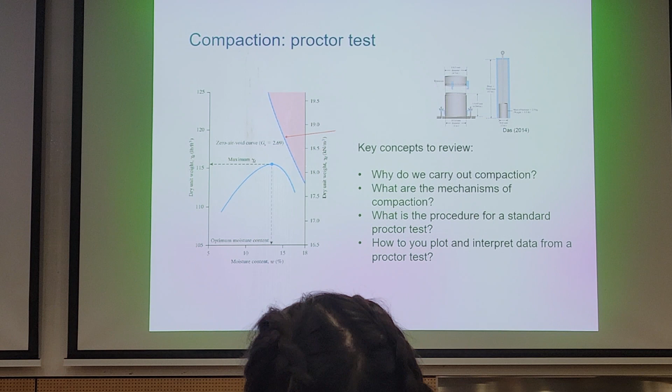Another aspect of shallow compaction that we looked at was related to quality control. There are 3 main quality control methods, if you recall: the sand cone replacement test, then we also have the rubber balloon method, which is

method-wise and concept-wise more or less the same as the sand replacement test. If you understand the sand replacement test, there should be no problem with the rubber balloon, because you're essentially digging a hole and trying to find the volume of that hole to deduce the dry density.

We also mentioned that there's something called a nuclear gauge. Although the concepts are more complex, at least you should understand for each of these 3 quality control methods for shallow compaction, what are the advantages and what are the disadvantages for these approaches.

Related to compaction, how does it happen in the field? What type of plants and equipment do we use? When is it beneficial to use a particular plant over another?

More importantly, how do we use relative degree of compaction or degree of compaction? How does it link between field and lab? You should understand the physical meaning of the degree of compaction.

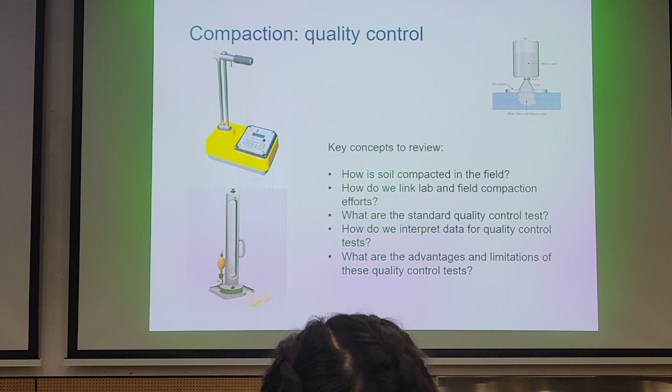And if I tried to change it into a rubber balloon question, if you understand the concept for a sand replacement test, it would be exactly the same - only, for one you're putting a fluid membrane in, and for the other you're putting sand in. So that's all you should understand for quality control or shallow compaction.

Near the latter part of the first module, compaction, we discussed deep compaction, and over the course you would have realized that there were overlapping elements in the other types of ground improvement that were also very similar to deep compaction. For example, some of the deep mixing or deep replacement approaches were somehow compacting soil as well. So there were some overlaps that, if you notice them, might be quite useful for you, right?

For deep compaction, you have to be able to understand what the fundamental differences are between shallow and deep compaction. When would you recommend either approach? How do we do quality control of both approaches? Evidently, we just talked about the sand replacement, rubber balloon, and nuclear densometer tests for shallow compaction, but can we do the same thing for deep compaction, or should we use something else?

If I give you a scenario on a site, maybe you can tell me which compaction method I should use. In order to do that, you have to be able to reveal what the disadvantages and advantages of both approaches are.

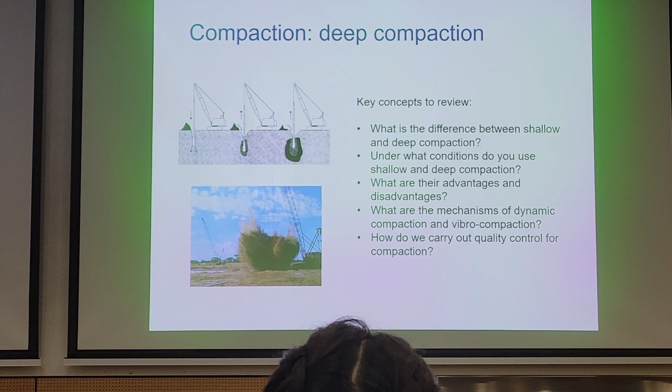Conceptually, there are 2 deep compaction methods: dynamic compaction, where we're dropping a heavy weight on the soil, and vibro compaction. You should be able to explain, at least conceptually, what we're trying to do in the soil with these 2 approaches, and that's all you probably have to study pertaining to deep compaction.

And then we moved on to perhaps one of the most important modules related to consolidation. It's quite easy to give written questions for consolidation, so please spend more time trying to understand the fundamentals. Even though consolidation was a single module, we broke it up into several core components. Let me talk about these components.

We talked about oedometer testing. Conceptually, what's the difference between drained and undrained loading? Can you explain what's happening to the soil in terms of soil mechanics fundamentally? What's the mechanism for consolidation? This is something you probably learned during your second year soil mechanics class.

And then, can you compare consolidation with compaction? What are the fundamental differences? How do we conduct an oedometer test? Can you discuss the procedure? Although we didn't go into a lot of detail, this is somehow a review of your soil mechanics class days.

And if you look at an oedometer test result, can you explain what's happening in terms of the phases? Is this primary consolidation? Is this secondary consolidation? What's happening based on this dial gauge reading with time or with effective stress? And what are the different aspects of an oedometer that we can vary? Perhaps, what does it mean to have single versus double drainage? These are very simple concepts, shouldn't be too perplexing for you because you have, well, passed the soil mechanics class, right?

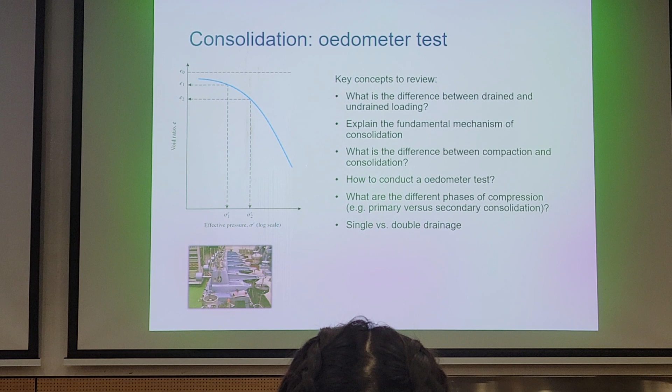And then, taking a step further with the oedometer test reading, some key concepts I want you to review. Evidently, we have to understand what is OCR. What does this ratio mean? To understand this ratio, you have to, of course, understand what the pre-consolidation pressure is. And we have discussed a graphical approach to find the pre-consolidation pressure, if you remember. Can you pull off the pre-consolidation pressure using this approach?

What does it mean when a soil is heavily over-consolidated? What does it mean when it's normally consolidated? Where are you on the graph for both scenarios? How do we estimate the compression index and the swelling index, CC and CS? What are their physical meanings? We always talk about physical meaning because that's the best way to grasp the concept. It refers to their stiffness, if you remember.

How do we predict secondary consolidation? We talked about what type of graph we need, because with secondary compression, we're having constant effective stress. We're completed in terms of primary consolidation, there's no more excess pore pressure. So what's happening to the soil? Why is it still settling, right?

Just like some of your questions that you asked me in your emails, what are we worried about after reclamation? Well, we're worried about residual settlement. We're really worried about secondary compression. When you hand over a site to your client, you have to tell them, okay, for the next 15 years, you will expect, let's say, 150 millimeters of residual settlement. There's not much you can do engineer-wise, right? Because this is the deformation caused by changes in soil fabric.

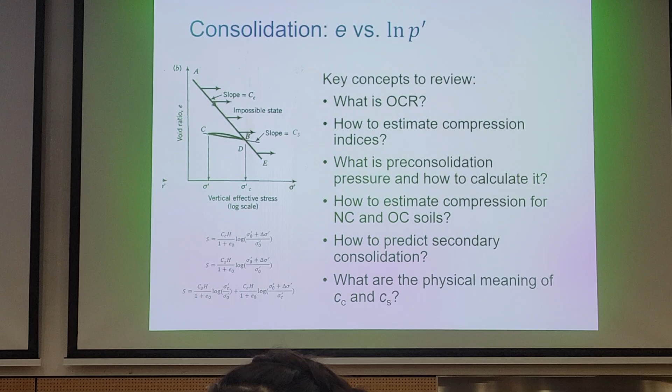Of course, any of these equations will be given to you, but the question is, do you understand the physical meaning of each variable? If we don't define the variables for you, do you still remember what each one means? That's a lot more important than remembering the equation. Remember that.

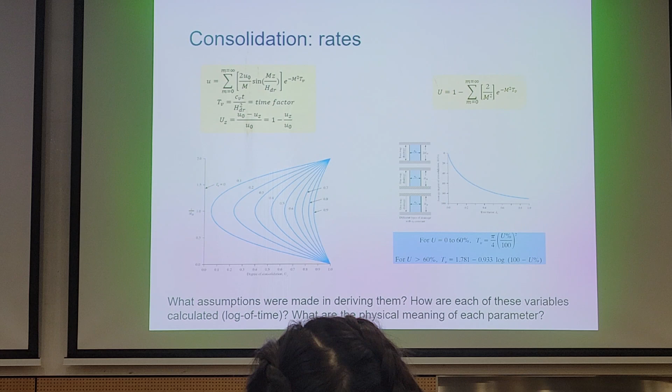So anything related to how long it'll take to reclaim a piece of land, how long before primary consolidation is over, or how long before primary and secondary consolidation is over, would be very normal questions to ask for rates related consolidation questions. Please review this part of the module.

After we talked about consolidation, we jumped off to a new topic called preloading. If you remember, there are two types: surcharge fill preloading and vacuum preloading. Surcharge fill preloading is the module where we talked about PVD drains. Now, PVD drains are quite commonly used in Hong Kong.

We also did a calculation question together using PVD drains. If I were to ask you, can you calculate the consolidation of this plot of land with and without the use of PVD drains, you should be able to do that, right? And if I said these drains, or this design, considers the effects of smear, or doesn't consider the effects of smear, you should be able to do that as well.

Of course, all equations, again, will be provided for you. But some things you really need to understand: if I give you these two equivalent diameters, do you remember what they're for? Which pattern—is it a triangular pattern, or is it a square pattern? Some of these things you have to really go through.

Otherwise, even if we give you the equations, you may not be able to use them or recognize them. Or if we give you too many equations, you might get confused about which to use. Sometimes the questions may give you more data and information than you need, so you might not want to be misled by the question. You have to understand the physical meaning of each expression.

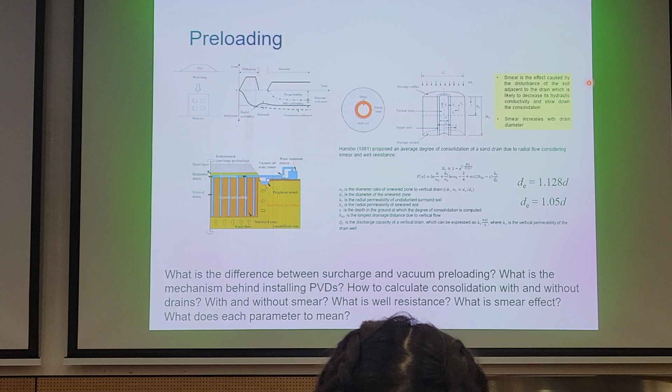And if I give you both sets of equations for radial consolidation, with and without smear effects, do you know how to use both sets? Can you explain conceptually what smear effects are, and also what well resistance is? Do you understand the range and the physical meaning of each parameter in those equations? That's what you need to know for preloading.

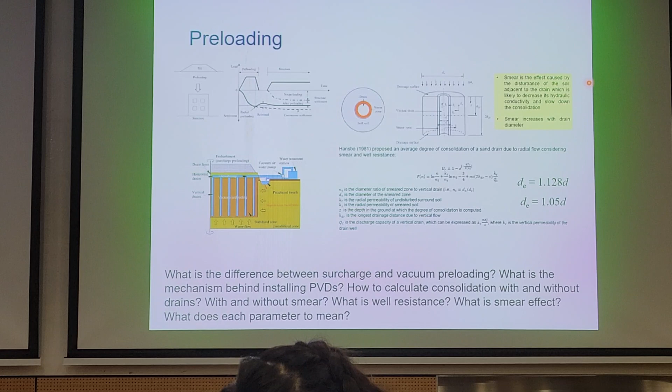And then we moved on to the next topic of essentially over-excavation replacement, and we somehow broke this up into two types. The first one was shallow replacement, and the latter part was deep replacement. So in shallow replacement, if I give you a generalized ultimate bearing capacity equation and all the bearing capacity factors, shape, depth factors, can you calculate the generalized bearing capacity?

And if I were to give you a question where you have to design for over-excavation replacement for the simplest mechanism, general bearing capacity, which is the first one in the red box, you should be able to tell me what depth we need to replace. And if I give you the properties of the fill material and the properties of the in-situ soil, you should be able to tell me whether an existing design is safe, whether we need to do replacement, and if so, how deep.

Now, we did talk about other methods of replacement, failure modes, for example, punching failure, and so forth. I'm not going to cover punching failure on examination because I think it's a little too complex and empirical, but conceptually I still want you to understand the four modes. What are the differences? Can you explain the mechanism, at least concept-wise?

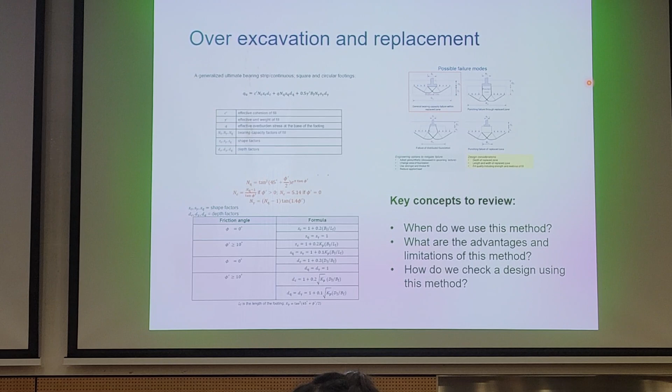For example, do we need to check if we will fail the in-situ soil by applying a load first? So there are different steps, if you remember, that we check for. Do we check for short-term and long-term conditions? So procedurally, you should at least understand the calculation approach for generalized bearing capacity failure for over-excavation replacement. But the other three modes are quite complex, so you can place less attention on those three modes.

For over-excavation replacement, we treated that as shallow replacement, and then we transitioned into deep replacement. For deep replacement, these approaches are highly experience-based, highly empirical, but we did spend some time to talk about the difference between excavation approaches, displacement approaches, dry, wet feeding from bottom and from top. What are the differences conceptually?

And if you look at this schematic at the top, we did talk about under what type of soil conditions each approach is suitable. So if you look at these approaches, can you tell me whether we should use this in clay, should we use it in sand? So you should be able to at least identify a suitable range of soil conditions for each type of method. Also, we should be able to discern the advantages and disadvantages of each deep replacement method.

So this module would be more conceptual based, right? And again, when you're studying, you could probably guess a lot of these things — what's more conceptual based, what's more calculation based. So the consolidation module will probably be quite calculation heavy, right? Whereas some of these approaches where we didn't do calculations together were conceptual based. So this should be the approach you take when you study.

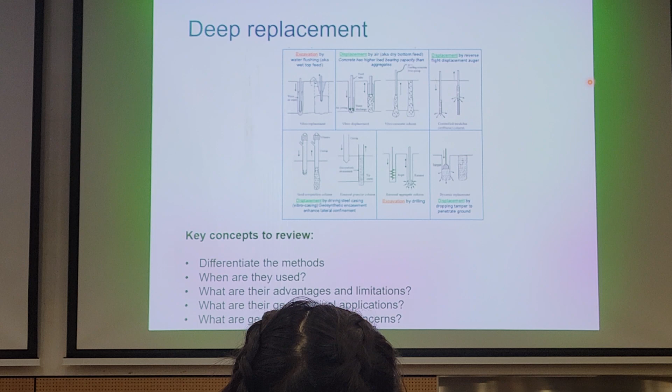Also, we talked about what geotechnical applications would be suitable for various types of deep replacement. So if I give you a scenario and ask you to recommend a form of deep replacement based on a series of prior conditions, you should be able to recommend the most suitable one. Or if I give you three options, you should be able to give the most pertinent one as well. So in order to do that, you must understand what's going on with each approach. That's generally all I would like you to review on deep replacement.

And we have drainage, dewatering, and geosynthetics. This module was also conceptual. We didn't spend a substantial amount of time trying to calculate and design a dewatering system in the ground using deep wells and sump pumps, but we did spend some time talking about what geotechnical applications we should use dewatering, drainage, and geosynthetics for. We also spent some time trying to differentiate among the different types of geosynthetics, what they're used for. We talked about different geotechnical applications where dewatering is used, such as cofferdams, pumping tests. So this module again would be quite conceptual.

If I give you a scenario where I want to have erosion protection, for example, or I want reinforcement, separation, then you can perhaps conceptually propose a suitable solution. And you may have noticed that geosynthetics were used quite a bit in other types of ground treatments, such as encased replacement columns. We use geosynthetics just to wrap our PVDs as well. So if you can spot linkages among the different types of modules that we've covered, then that would be useful as well.

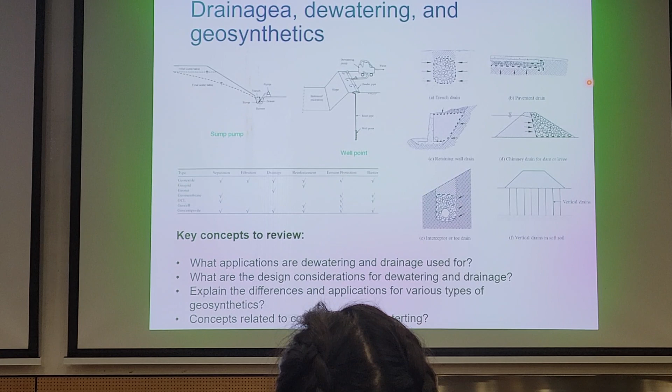And on the right, we show a series of applications where we have drainage being used. So you can list some of these applications, or list some of the applications where geosynthetics, drainage and dewatering may not be usable, or may cause practical problems that would be helpful as well.

Nearing the end of our course, we talked about grouting and deep mixing. So these are what we call chemical ground improvement approaches. For grouting, we talked about permeation grouting, compaction grouting, soil fracture grouting, jet column grouting.

Of course, we have conditions where we can use, for example, compaction grouting, but it may not be the most optimal range to use for that type of soil. Do you understand the procedures for permeation, compaction, soil fracture grouting? Under what geotechnical applications are these most favorable for?

What do we consider in a grout design? Do we care about its rheology, particle size, groutability? What are some factors that we worry about? Are we worried about the overburden pressure, injection pressure?

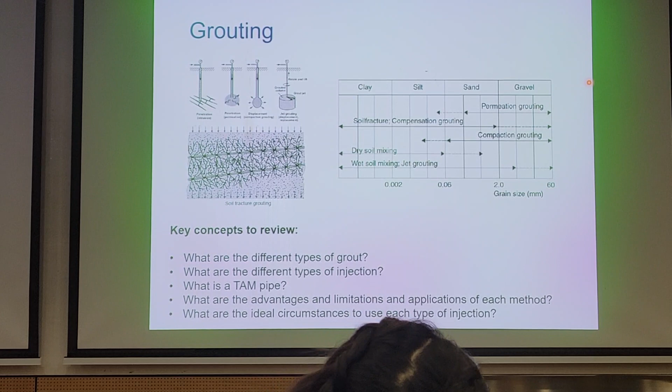The last topic we covered in our course was deep mixing. Now, in deep mixing, we talked about wet deep mixing and dry deep mixing. The only fundamental differences are the type of binder injected, whether it's powder or slurry, and of course there are slight differences in the construction sequence.

And we talked about what type of deep mixing we used in Hong Kong for the third runway system, and why we did that, and what are the disadvantages of using wet deep mixing. So based on our discussion in our course, you should be able to review the advantages and disadvantages of deep mixing using various techniques, and the applications most suitable for deep mixing.

Some case studies that we discussed related to deep mixing in Hong Kong, you should have an idea of how we applied it in Hong Kong. Because what if I asked, what are potential ways to improve existing practice in deep mixing? Where do you see potential improvements? If you understand conceptually what's going on, then at least you can answer those concept questions. So not too complex here, mostly conceptual items you need to worry about for deep mixing.

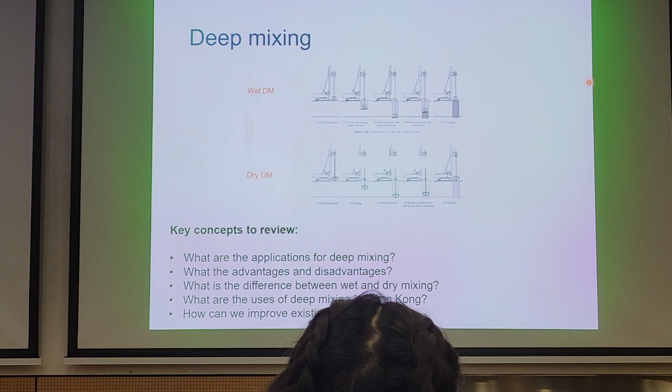And we talked about in situ testing. Near the end of today's lecture, I'll go through two quick examples of in situ testing with you. Why do we do in situ testing?

Would you consider sand replacement in situ testing for shallow compaction? When would we use SPT or CPT, right? These are the two main types of approaches we covered. We didn't cover DMT, PMT, or VST. We covered SPT and CPT, but these are among the various types of in situ testing.

And why do we do in situ testing? Why do we rely on so much for ground improvement? And we talked about these concepts, particularly SPT and CPT testing. What are the procedures? These are so commonly used in Hong Kong that we should understand these two topics: how to calculate the N-value count, how to calculate and correct SPT.

Corrected values. If we look at CPT data and I give you all the equations you need, you should be able to interpret the CPT and SPT data sets, right? So key concepts to review for in situ testing: what are the standard methods or the test procedures for SPT and CPT?

What do we gain from doing SPT? For example, with a split spoon, we can get some highly disturbed samples. CPT, you're not going to get any samples, but you'll get continuous profiles. So there are obvious advantages and disadvantages with each type. SPT data is somehow difficult to interpret, depending on what cutoff values or termination criteria you're given.

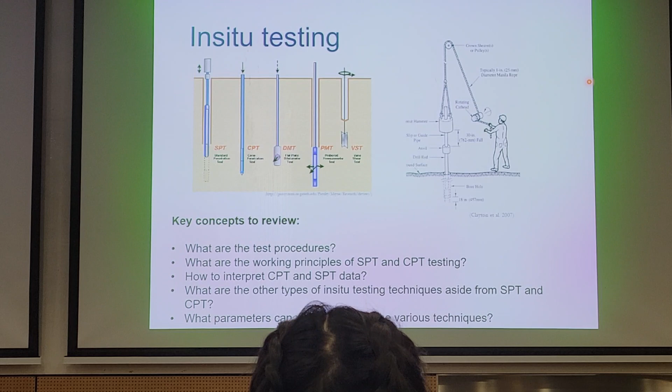As we mentioned continuously throughout the review, we really have to know when we use a particular type of method and what are the pros and cons of each method. If I give you a scenario for a particular ground condition, can you recommend what geotechnical ground improvement technique to use, and what should be the subsequent quality control or quality assurance measure? If you're able to link the modules together, there's a short concept question on how you can improve the existing state of the art, then perhaps you can propose some innovations, some hybrid approaches based on your understanding of the modules. So conceptually, and calculation-wise, that's all I want to talk about for the review. Some of these were a little too obvious, as you'll see on the exam, but I hope this helps.

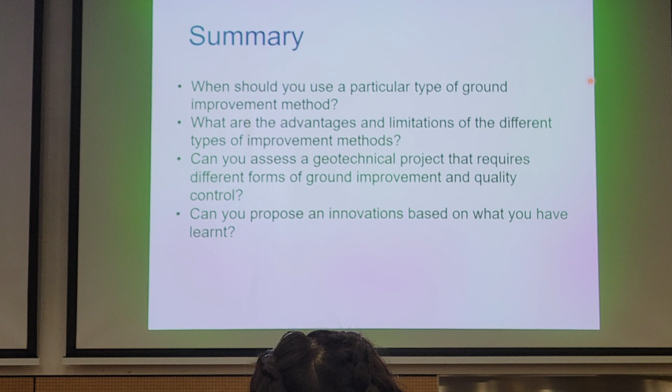So to end this course, I wanted to just cover two examples with you, SPT and CPT. If you were to see an SPT related question, one type of question would be how to interpret a table of SPT data. We went through that example together in class.

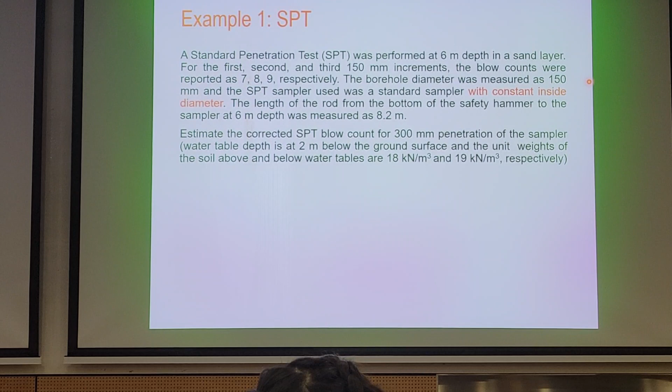A second type of question is, how do you correct for SPT values? In this example, you're given the soil geological model, you're told depth, then you're told the blow counts, the measured borehole diameter, the measured penetration increments. You're using a standard sampler, and you're given the length of the rod. Then you're asked to calculate the corrected SPT value for a particular penetration.

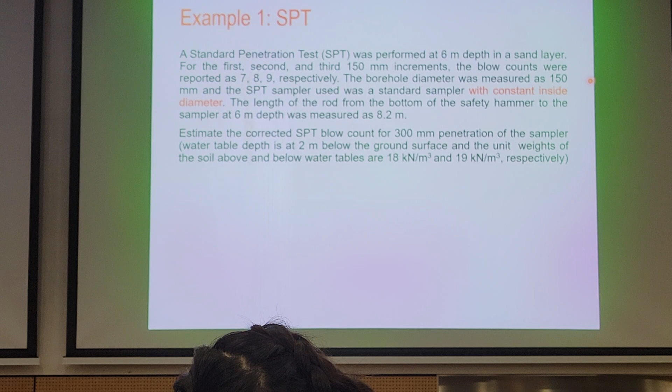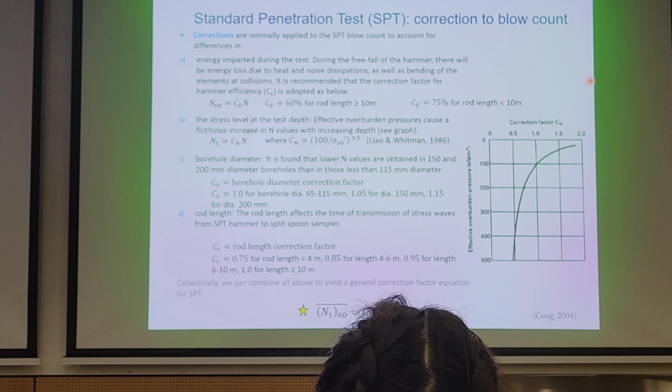And of course, you're given the geological conditions simply by saying the water table is 2 meters below the ground surface, and you're given the unit weight. So how do you get the corrected SPT value? If you remember from our course, I give you this slide, which has all the equations for SPT correction, and you would get all these equations on the back sheet of your exam anyway, for the various types of corrections and conditions.

So we remember that there are 4 types of corrections: hammer efficiency, effective stress, borehole diameter, and rod length. This was in your notes, right? So if you want to calculate a corrected SPT value, you would just look at each of these corrections.

So rod length 8.2, you know that you should use 75% under A. Corrected overburden pressure, you'll be given the expression Cn. You can calculate C subscript n is 1.18. On the top right of the slide here, you have the ground profile if you need to draw it out. You have the correction for borehole diameter given as 150, so we know that for a 150 diameter, we are given a correction factor of 1.05.

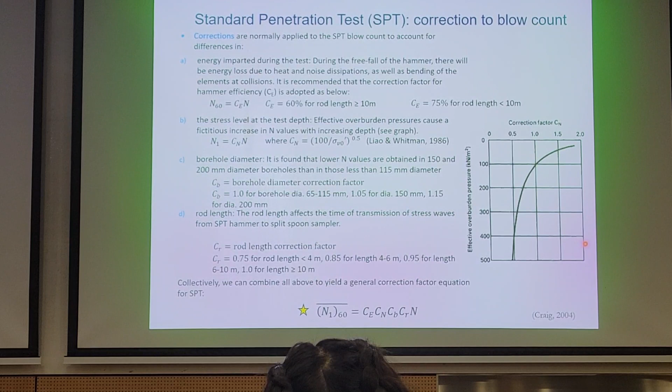Rod length 8.2 - if you go back to the slide, for rod length you're also given the recommended correction factors for C subscript R here, that's why we use 0.95. And to correct the SPT, it's quite easy. First, you have to know what your non-corrected N is. Based on the data, our non-corrected N is corrected by multiplying by 4 of these correction factors, and you'll get 15 blows per 300 millimeters for medium sand.

So we may try to confuse you and say, for the seating drive, we got this penetration, and you should know that we don't really count the seating drive. If you remember from our examples together, don't be confused by that. So it's quite straightforward if you understand the concepts for SPT. And this is about as complex as SPT related questions can be.

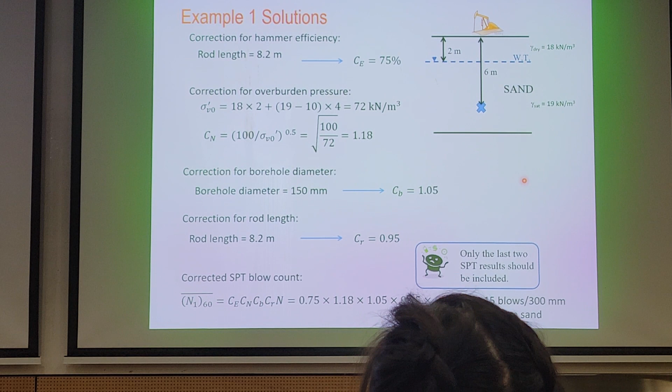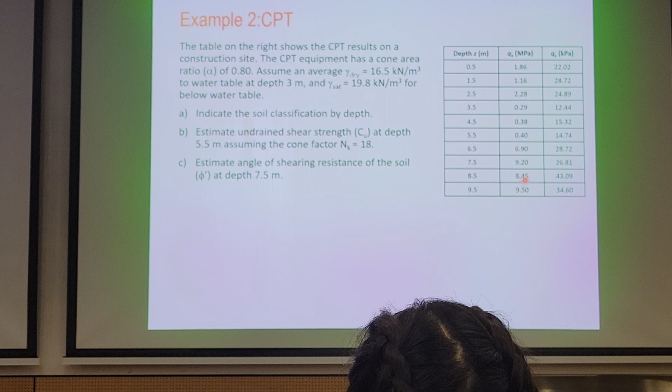The second type of question you could see is related to CPT. You're given a table of CPT data, told that the groundwater table is 3 meters below the ground surface, and given dry and saturated unit weight of the soil. You're asked to do 3 things.

First, what type of soil is at a particular depth? Then estimate the undrained shear strength at 5.5 meters, given the cone factor. And estimate the shearing resistance, essentially phi dash, at 7.5 meters.

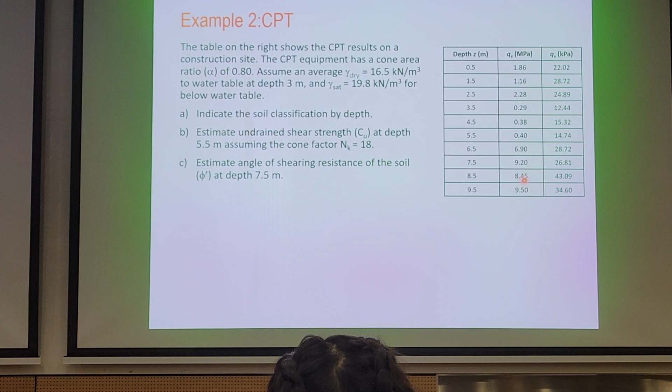Remember in the first question, part A, the groundwater table is 3 meters below the ground surface, and we're having 2 different unit weights. You're given this expression, so you calculate the corrected cone resistance. But the key trick here is to be able to differentiate in the expression when to use total and when to use effective stress.

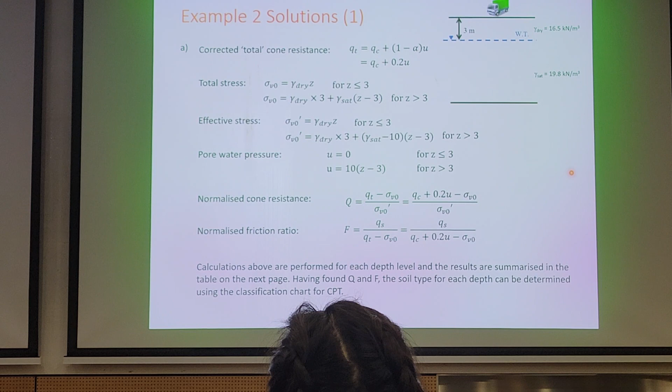Now the question is, what do you do with it? Well, to identify the type of soil, we would give you some graph as you see on the right, and what you would do is tabulate it. All those equations I gave you, you can tabulate it. And obviously we won't give you 20 depths to calculate.

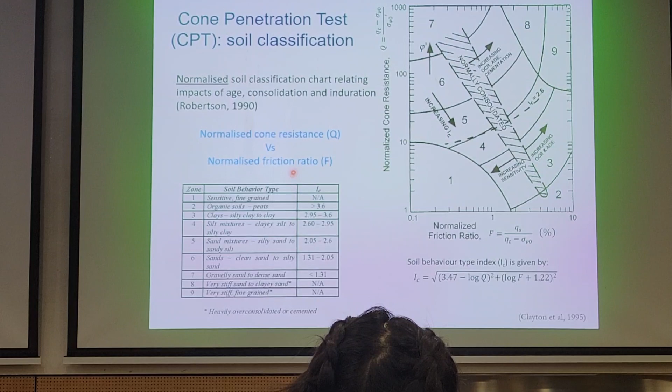So if you look here, what do you need? You need normalized cone resistance, you need normalized friction ratio, and you can identify what type of soil by using this table here. Based on that, can you write down what type of soil classification you see? Also, other parts of the question ask for the undrained shear strength?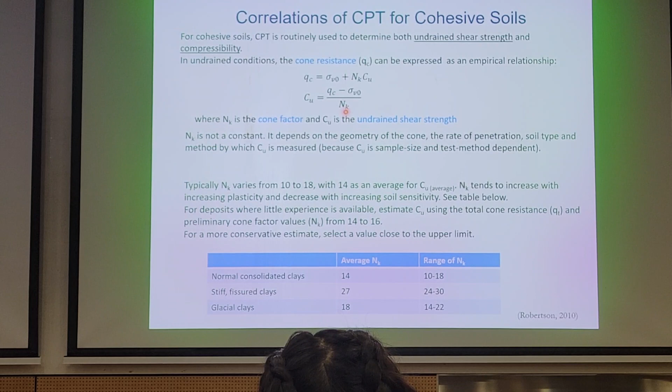Well, this is also from your slides. You can calculate the cone resistance to get the undrained shear strength if you know the cone factor Nk, and we gave you the cone factor in the question, so this is not additional information. This slide is directly from your notes on CPT.

This is also directly from your notes. If you know your cone resistance and you know your vertical effective stress, then you can pull off phi dash. So based on what you know from your notes, you can calculate the undrained shear strength. Just don't get confused, right? If you don't see a dash, it's not a mistake, the equation must be in total stress.

You're given Nk as 18 in the question. For a particular depth, 5.5, from the table before, you can see that you're given QC and total stress, so you can calculate the undrained shear strength as 16.7 kPa.

That graph, from 2006, would give you 39 degrees.

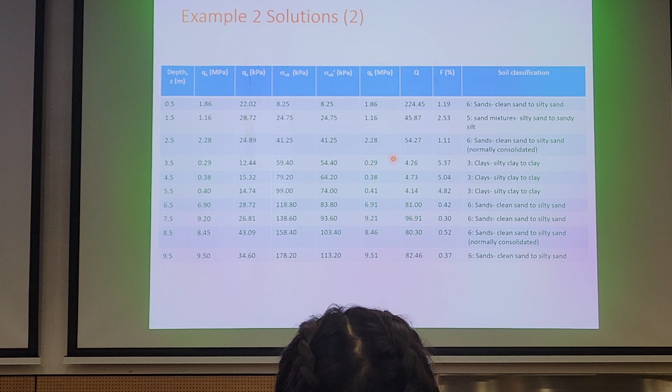So anything related to CPT and SPT, we will give you all the equations and graphs that you'll need to extrapolate. The key is just to form a table where you can pull off all data at any particular depth, and you can plot any graph you need, and that's how you would solve these type of questions. So they're not too complex, and that's all I want to talk about for the review.